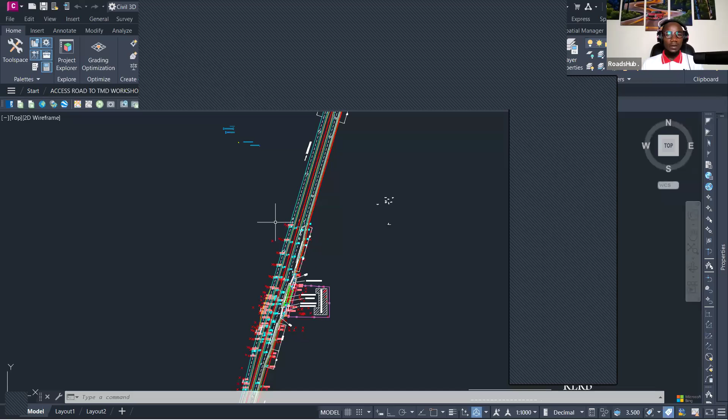We've said that show, don't tell, and this is the time to do exactly that, to show without telling. So this is some work that I received from engineer Samuel Munoru, and I want us to go through it briefly, check for him because he has put in the effort.

We say that when someone has put in the effort, we must be able to acknowledge the effort, and most importantly also give feedback so that now they can develop themselves and become better and better. So let me do away with these points so that now we have a clean working space.

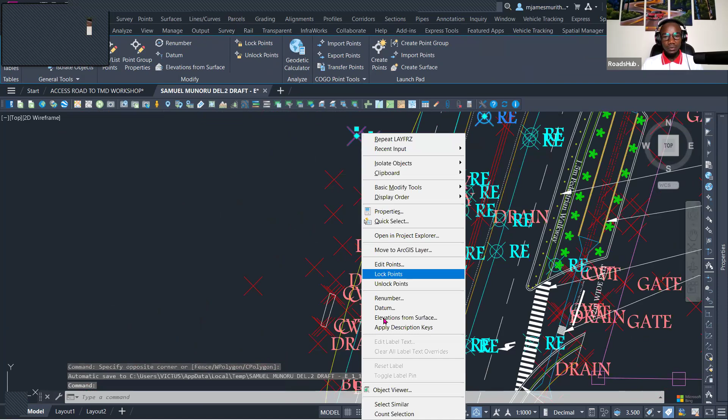So I'm going to isolate objects and say hide selected objects. So I'm going to retain the bus bays and all of that.

So I want us to go to the section where we are designing this. The first thing we're seeing is we're having two lanes at this point, and then we're having the acceleration, the diverging section, and then we are accelerating to be able to make a U-turn at this point. We're having a U-turn of 14.5 meters, including these 3 meters and the 3 meters here.

Remember also, having the deceleration or the acceleration section here is always dependent on the amount of space you have, and also the volume of traffic that you have at this point.

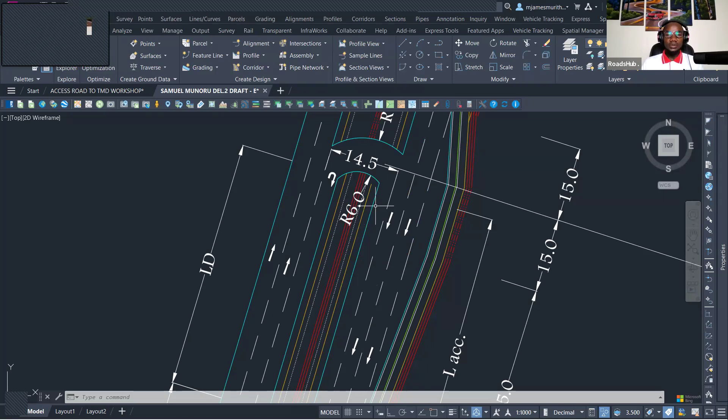And now the trade-off is always about this: this loon design is meant for urban areas where you don't have a lot of space for the sections, and also you anticipate that traffic is moving at a slower speed. So sometimes in your design you may not be able to accommodate the acceleration lane, and therefore you may need to design without it. But of course, the acceleration lane will always serve to improve safety and the level of service of that specific section.

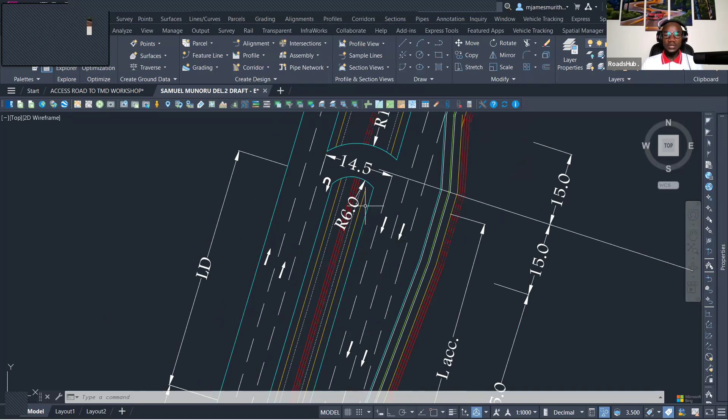On this other side, we are talking about the section for large vehicles. Remember, this section is for the small vehicles, just like we said. And then now we get to do some widening for what the vehicles have. So I can see that the crossover is right here and all the information is done.

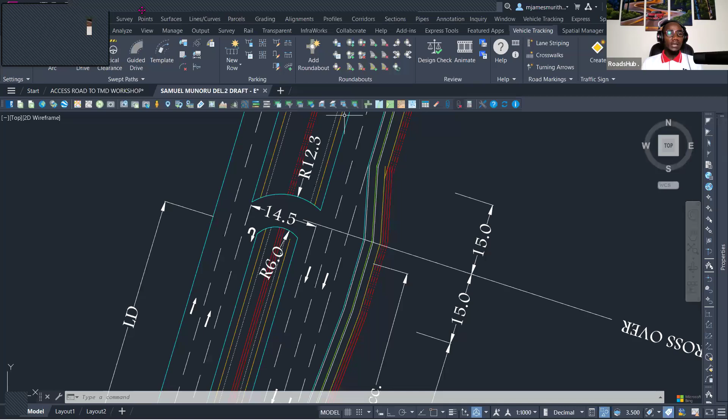So what we do - this is a very well done design, but then we put it to the fire so that we see whatever decisions you made. So I'm going to go to the vehicle tracking, and once I do that, I'm going to activate it.

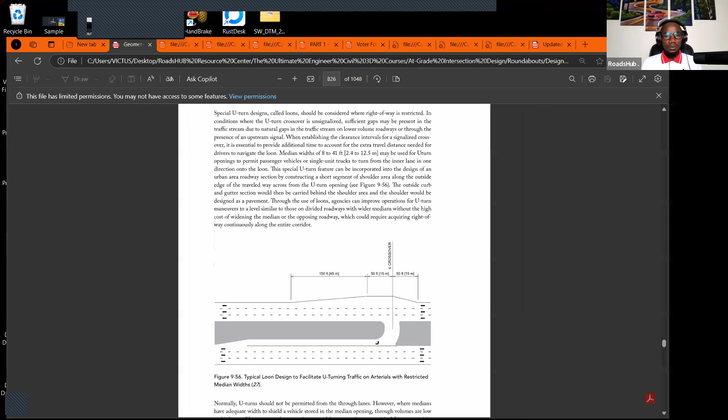Okay, so I'm going to go back to this one, and once I do that, I will hide this. I go to my vehicle tracking. Once I go to that, let me just put this on this other side. So I'm going to vehicle tracking.

Let me load the vehicles. I had done your test before, so let me go to US design vehicles and then statewide AASHTO 2011. And then after that, yours was WB19 - I cannot see it, I don't know whether I can be able to see that here.

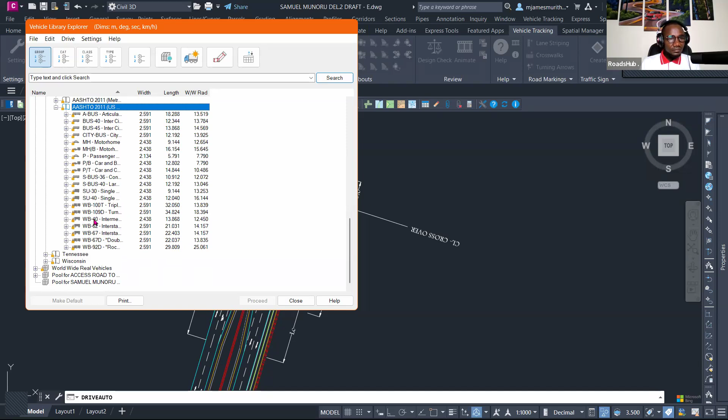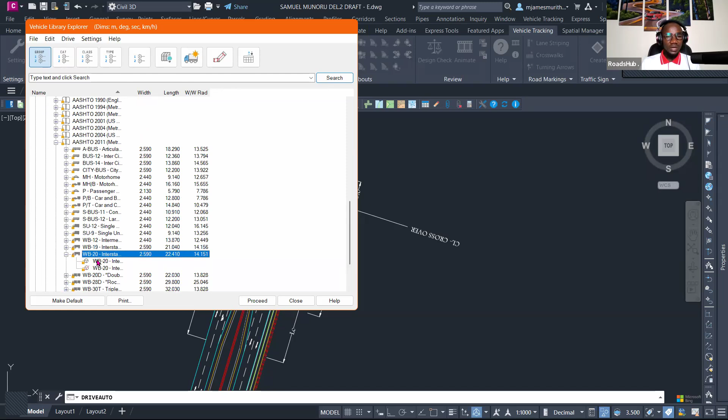I cannot be able to, but mostly you find that the WB40 is always the obvious design vehicle that we get to use. Let me see whether 2011 has the WB19 right here. So you see yours is WB20. Yes, WB20, so let me get to use that, and then proceed.

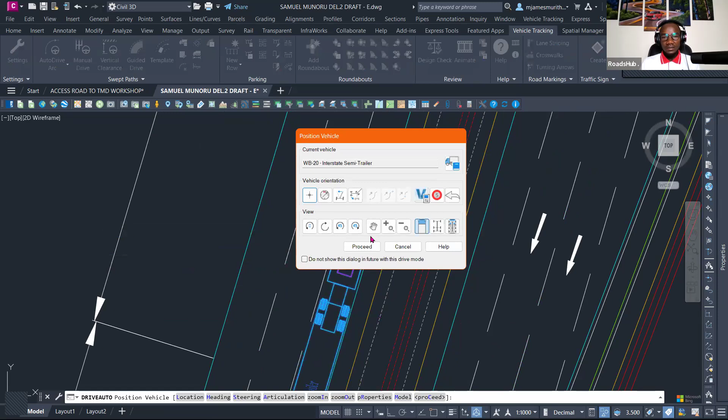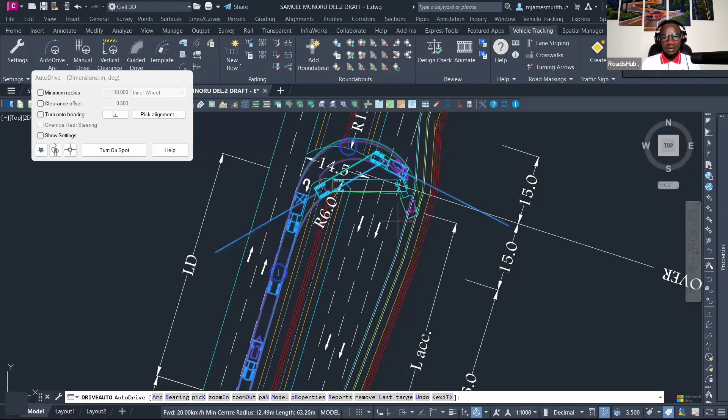I'm going to accept this, so let's put this design to test. So I'm going to have my truck right there, and I can be able to proceed. This truck is coming all the way to this point, and then trying to make a turn all the way to this other side. So you can always have it here, have it at that point, and then now it will start moving all the way to this other direction, and then the truck now moves out.

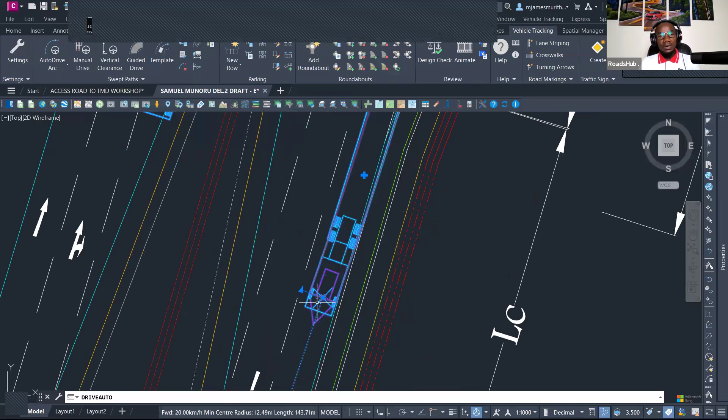Remember, when we are doing this test, we said that the inner lane to inner lane turning is done for the small vehicles, and then the inner to shoulder, because this section will always be a widening that is done on the shoulder, will always be for the large truck vehicles. It's important to take note of that. It is not every vehicle that will make the inner to shoulder turn, it is only for the large truck vehicles, which accounts for the minimum or the least percentage of traffic that you're going to have on your roadway.

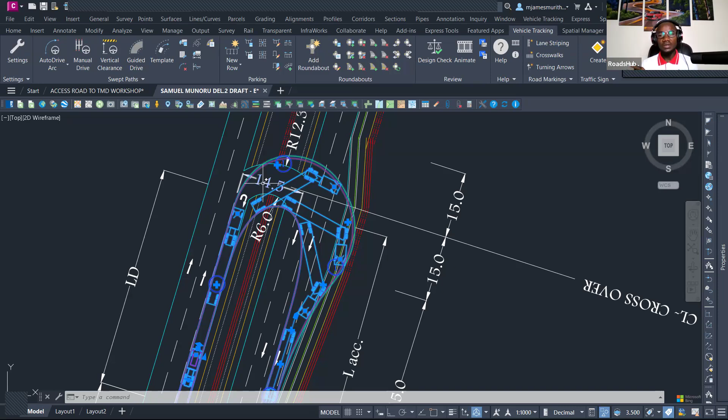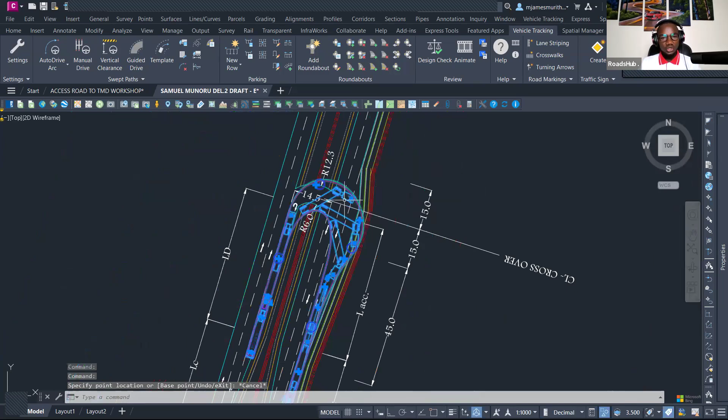Remember, you can always use this node to move it, to check and modify the sections. So for example, let's say I would want to... I think this is the best route I could master from this one. So what I'm going to do, yes, this is a fairly good design, engineer. You can see the only thing is the geometry, where did you position your curves? Mostly these sections will be very wide, and I think we also witnessed this yesterday, and also the geometry of how the curves happen.

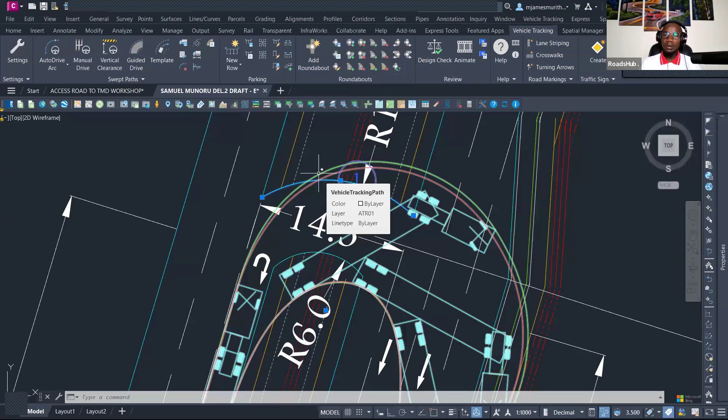As you can see, this one is going to vary according to the design vehicle that you've chosen. So if you choose WB40, it will be different. If you use a passenger car, the section is very different. So I'm going to send you the vehicle tracking check, so that now you can modify your geometry accordingly. You can see with the section that you've provided, it will be very difficult for this vehicle to be able to make a complete turn at this point.

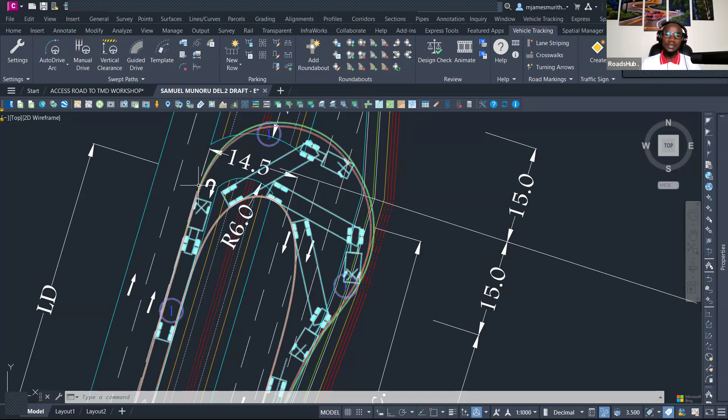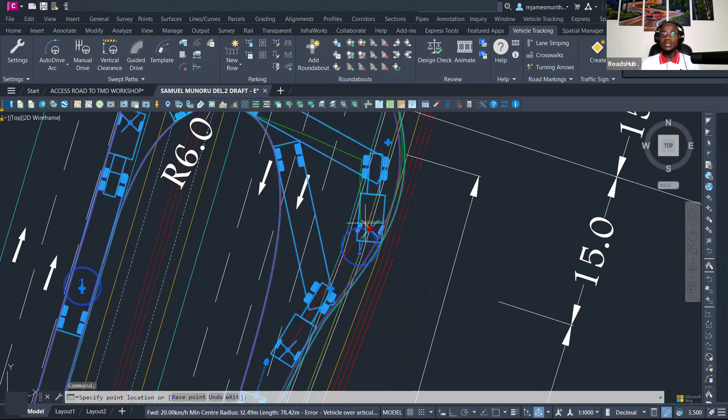You will also note that the standard has not specifically given the actual widening of the shoulder. They are not very explicit on the amount of widening that you need to have on the shoulder, because the geometry that you have here will be able to determine the amount of widening. For example, remember like yesterday we were talking about doing a widening of 3, and clearly you can see it cannot accommodate the design vehicle. It's important to know that this is more of a sample design that we are working with. In an actual design, you will have the traffic survey done, and you will know the vehicle you are working with, the dimensions.

And then as you're doing your vehicle tracking test, actually now I think it's a requirement in almost every urban design, in every intersection design, you must be able to do a vehicle tracking to show the path of how the vehicles are going to move through that section before you complete it.

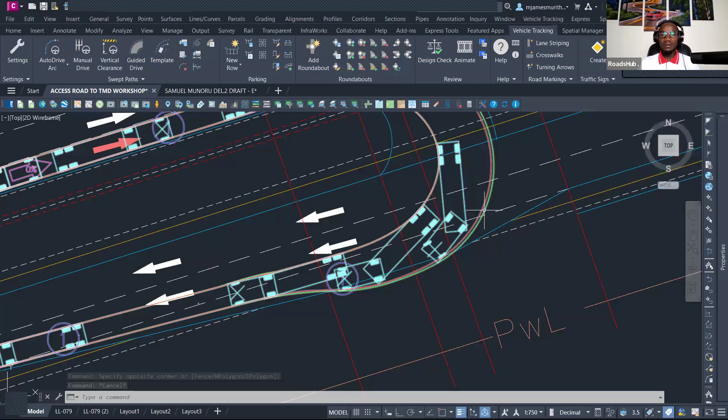I also got to complete the same, I just did what we were working on yesterday. So this is the same track moving all the way around the section, and this is the movement that we are making. Just like what we have seen with Sam, we can see that the section, how we thought of widening it by just having the 3 meters, would not necessarily be able to take care of all our needs or ensure a very smooth maneuver for the vehicle at this point. So we can be able to actually visualize that.

So I'm going to select the vehicle tracking, let me position it well on my screen.

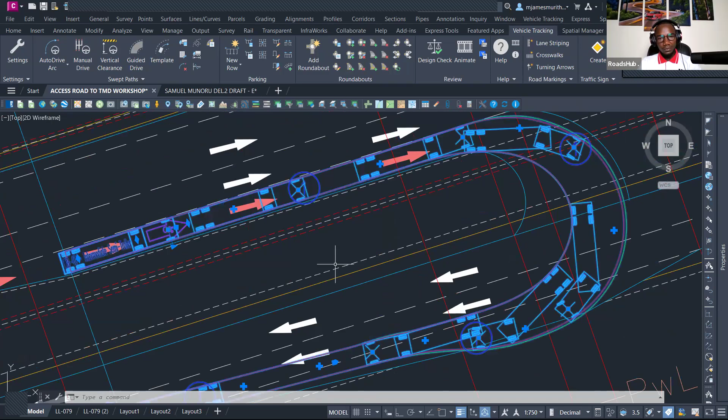I'm going to select the vehicle tracking, and then I'm going to animate, and in the animation I'm just going to play it.

I want you to look at something. Just look at the start. There is a vehicle here, at the very start, I don't know whether you can see it.

We wanted to drive through the section, so we just play it and we can see how it's going to make a turn. You can see it's making a very smooth turn and getting out of the section very smoothly.

This is an important part for you to note, at least now that you know the vehicle can be able to make a turn at this point, it is easy for you now to modify your geometry to accommodate these.

Other than now you just submitting the design and they have already done the setting out and all of that, they have actually done even the base layers, and then that's when they notice that the vehicle cannot be able to make a complete turn through that section.

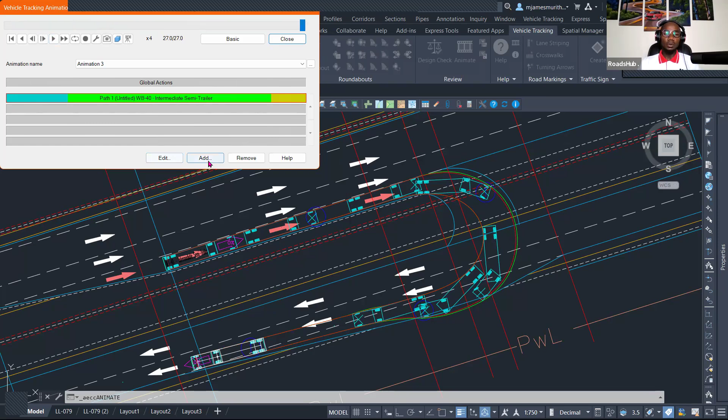So this is a very good swept path analysis of any design. It's very important for you to make sure that your design is at least functional, that it can work in a real site scenario.

So today's session is going to be actually a replica of what we already did last time, and I hope that you also get to work on it.

These are not the kind of things that you listen to and observe and watch. They are not, my guys. They are not. These are the kind of things that you must do - you must experiment, you must do them.

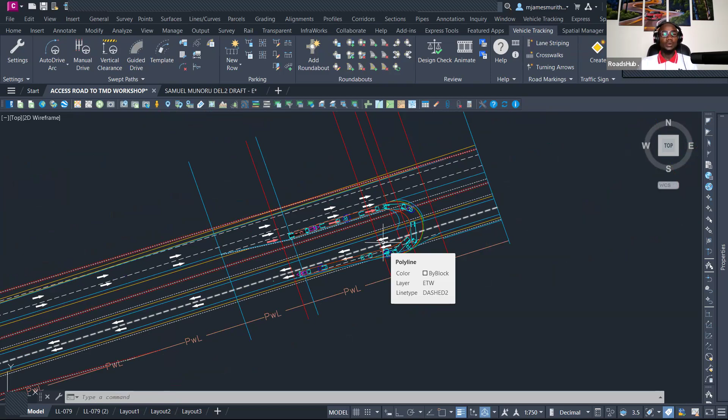Take your time, work on them, experiment. I'm actually offering to give you guys guidance, and this is what surprises me - you offer people guidance and feedback and they don't do it. So I want you guys to be different.

I want you to work on it, find some time. Out of the sessions, you can allocate 45 minutes, work on whatever you can within that time, and then you can submit it for review if that resonates with you.

So I will repeat almost the same process. Today I'm not going to do everything for you guys. I will leave it as a task so that you can work on it, so that tomorrow we can focus on production of this design.

Tomorrow is also on Saturday. I would encourage you people to take time and work on this design. Probably you'll be off from work, you will get some time.

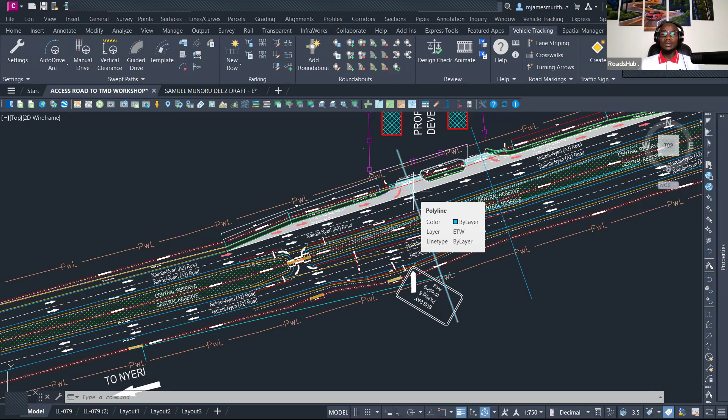You will not get anyone who is training you on these things, I'm telling you for a fact. And therefore, if you don't do it, it will just go to waste, and I don't want that to happen to us.

So we are going to do the same for this other section. The most important thing to consider is which traffic are we taking where? In this case we are taking the traffic on the left-hand side and we want to take it to the right-hand side, and at what point should the traffic be able to make the turn?

So you find that there is someone who will be able to do it at even 100 meters from the edge. But of course, that would therefore lower the capacity, or the level of service, of the road. For example, you can see here we have

the deceleration lanes, and then you want to have a U-turn just next to it - it means now it's going to obstruct traffic. So in this case, we do 400 meters, that's what we are working with, and we are already at 400 meters.

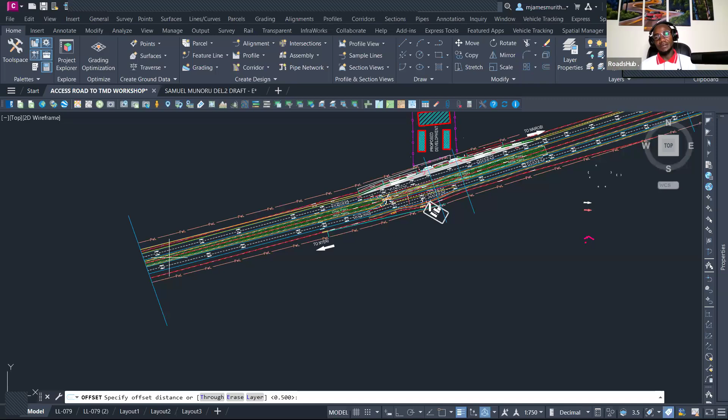Should they be beyond the 400 or should they be in the 400? That is also the other question. Remember, this is where the point of the U-turn should be, so this means motorists can start decelerating before the actual U-turn.

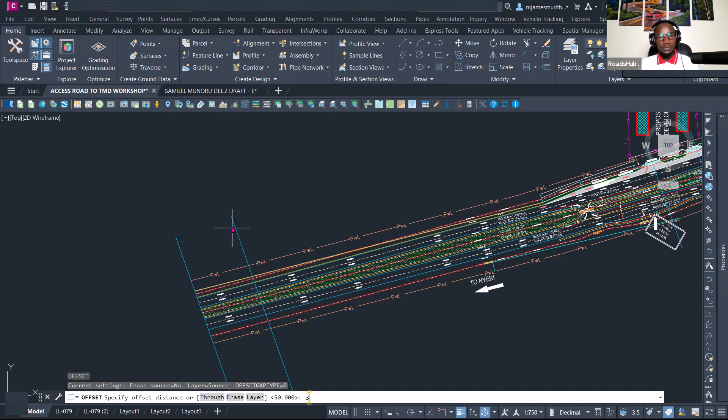So we do the offset, and in this case we have a deceleration section of 50 meters, so we can do 50 inwards. Then after that, we do another 35 for the diverging section. Let me offset, and this one is going to be 35, up to that point.

Once we do 35, we can start modifying and editing the entire section. The first thing is we can trim the median and just remove it for now, so I'm going to remove that part of the hatching.

As we said, the next thing would be the width of your deceleration sections. So offset again of 3 meters, so this is 3 meters in, and then of course we want our curb at 0.2 or 0.3, whichever kerbstone you have for your case, and that's it.

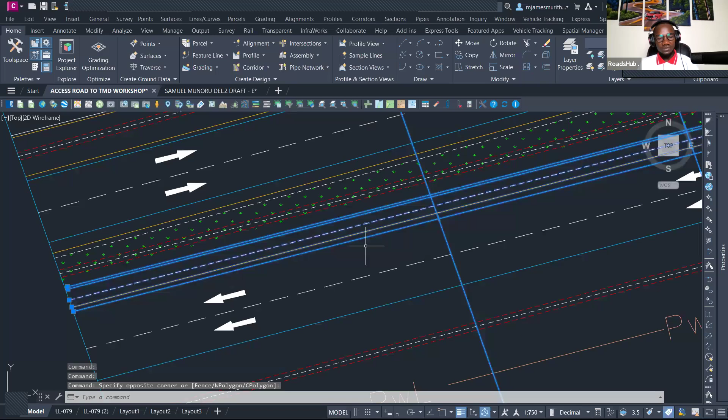Once that is done, we can trim all of these other elements. Let me see how I do that. Yes, I can select all of these and say trim. So in the trimming, I want to trim the shoulder and trim this one, also trim this and also trim this, so I'm left with the edge of traveled way of the existing roadway.

And these other points, what do I need? I do away with this, and I also do away with this point, and I will also do away with these ones because they are not continuing to that edge. So I want to connect this point, the edge of traveled way, should be able to taper back to where we have our edge of traveled way of the normal carriageway.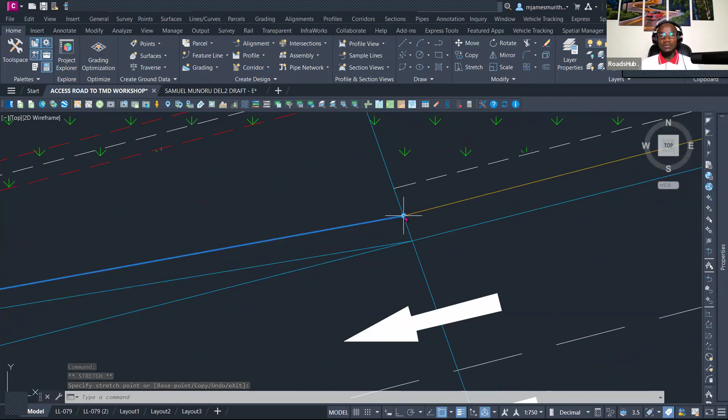Therefore, if that's the case, we should have a protective curb at the back of that section. Sometimes when you do the offset, it doesn't snap directly to this point, and also remember, sometimes you don't have the curb all the way to the roadway, but if you hand it, you can join it directly to that point. But of course, the obvious way is that it needs to taper back to the edge of where you have your acceleration lane. This is also contextual, depending on what is happening on site.

The other thing is we can break this section. Remember the road marking, and these lines should go hand in hand with the principles of road marking. So if you're marking this section, it needs to be a broken line, and a broken line means vehicles can merge or change lanes from one lane to the other. So we break this, go to modify, and there is the break option, and we select this point to break our acceleration lane.

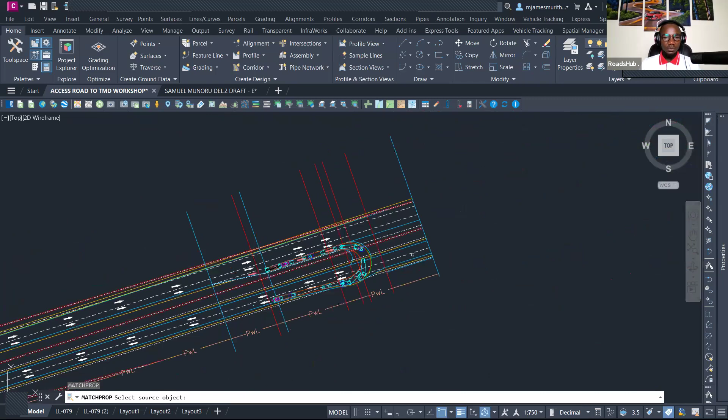The next thing we need to do is match properties. I don't know whether we prepared one for match properties, let me look at what we did for these. Yeah, so we are going to use this one as our reference, so we match properties with this so that there is uniformity.

Then after that, there is match properties for the kerbstone, so we want the kerbstone to be uniform throughout the section. This uniformity of the different elements representing, or rather the different AutoCAD objects representing our design elements, is very, very vital for you as you do your design.

So that's it. In this other section, we didn't include an acceleration lane on the other side, so now I want us to factor it in here. The assumption is the traffic is very high, and we have sufficient road reserve, or the median is wide enough to accommodate our section. Remember also, this is contextual, depending on what is happening on site. There is no one size fits all. Your work is to provide a solution that is going to work on that specific site you're in.

So I'm going to do my offset for the other section. It's basically the same thing that we were doing.

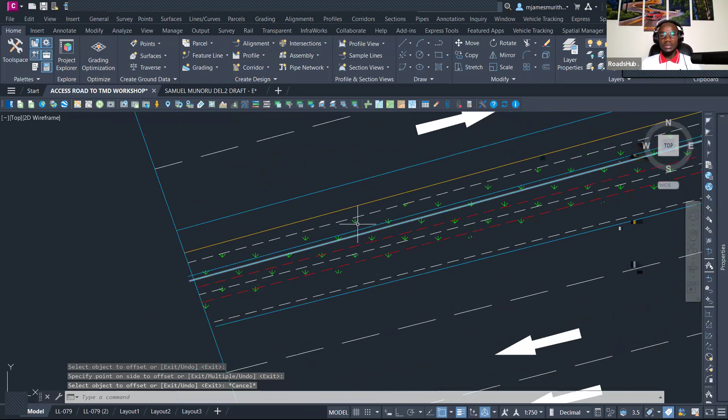It's important to note, as I said earlier, this is contextual, and therefore you need to be careful where you position your different elements, so that you don't give designs that are not workable on site.

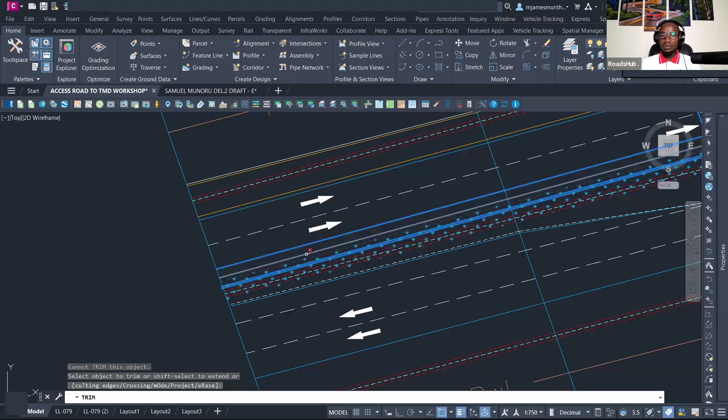So what do I need to do? I can clear these elements because I don't need a shoulder here, and I also don't need the median, so I can do away with it at that point. Yeah, that's good. I have my sections, and that's all.

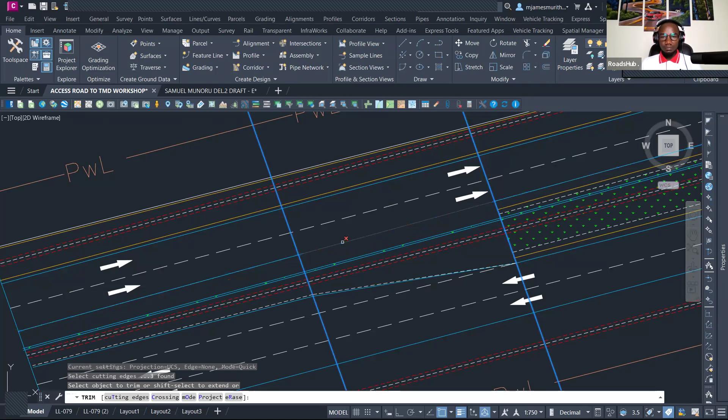What I need to do is I should have trimmed this part, trim right there. Should I? Yes. So I have my acceleration section here, and therefore this one will need to taper into the edge of traveled way.

Remember, now you're directing your traffic back to the main highway. That is what you're doing at this point, and therefore this should have been continuous up to that area. And then I also need to do away with these lines because I don't need them. Trim that, and then I'll do away with that.

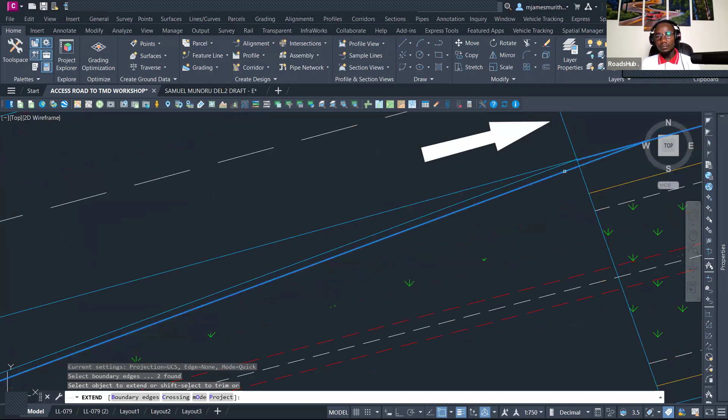And then I'll do another offset of 0.3 meters, and push it here. Make sure that it tapers nicely into this. I make sure that it tapers nicely into that.

And once that is done, I use MA again to match properties. For this section, this is the deceleration. And then also for the kerbstone, this is the edge of kerbstone. And then I am done with my section in that manner.

So once that is done, at least I'm confident what is going to happen. I can be able to even have my arrows of traffic just to show the direction of traffic at that point. And I can also do the same for this other side to show how traffic is going to maneuver into this area.

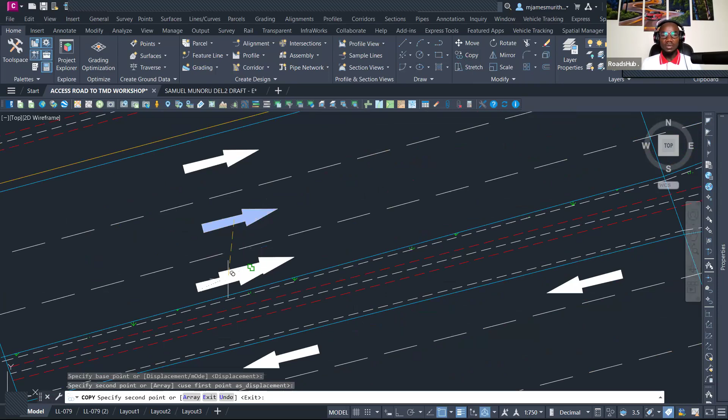Now there is the other point. If you find that this can be accommodated in your section, there should be uniformity of design. This is an obvious thing that follows our natural human behavior, that if we go to this section and see Y, or see something like this, what we expect is when we go to another similar area sharing some similar characteristics, we expect the same thing.

So this is why, for example, when designing these intersections, it's important if we have decided that, and we can see that this one is being accommodated. Let me see.

Let me see what is remaining of the median section. It's 3 meters. So okay, 3 meters, actually almost 3.5 meters. So that can be able to accommodate a good ditch at this section.

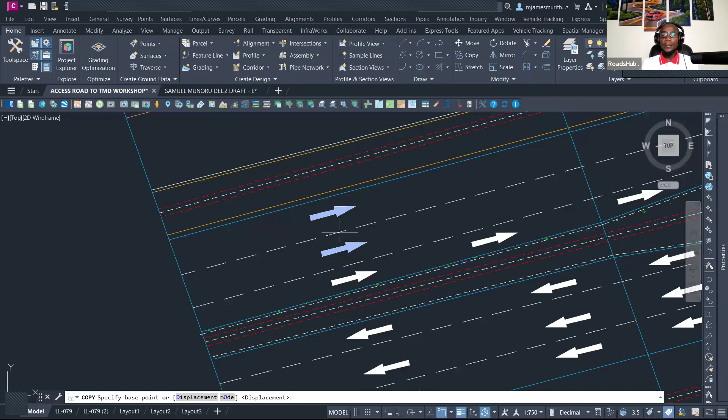So if this is the design that we have adopted in this section, please note that even in the other sections, the drivers will be expecting that you have an acceleration and a deceleration lane. This is very, very important for you to maintain the consistency of your design. And that is a principle, actually among the first principles of design, that you need to ensure consistency of the design elements to make sure the drivers don't get any surprise elements along your project road.

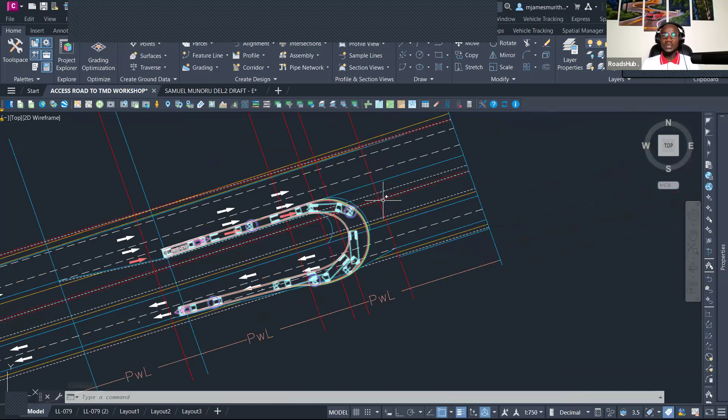Okay, now the next thing that you'll be doing is we want to design the turning that we need to have. So what we're gonna do is the same thing that we did to this section. We want to extend our roadway at least some meters up there so that it can accommodate the U-turn, and then we show a section that is above the U-turn.

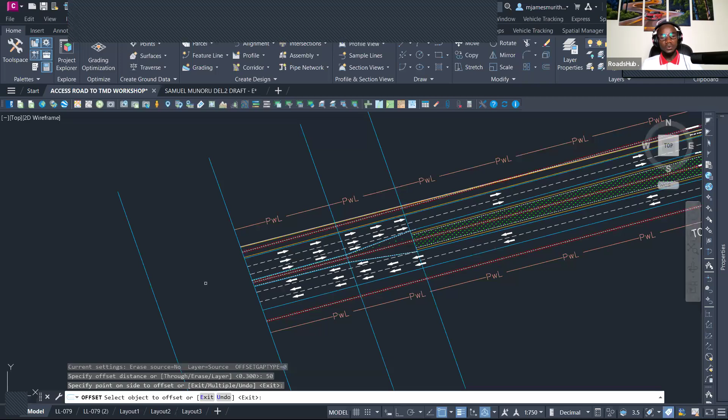In this case, we can actually do an offset of, let's say, even 50 meters up to that point. And therefore what happens is I can extend my elements to this area. So I'm going to say extend, and I am done with that extension. So after extending, now we know this is the mark where our U section should be able to start from.

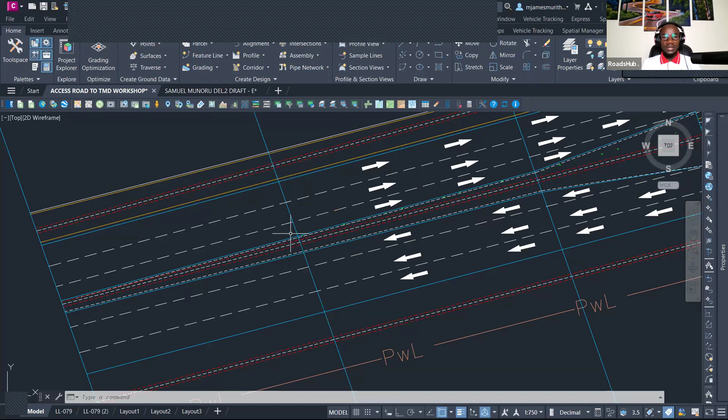It's important to note that during this extension, we should have done it before, because now it has extended as 3 lanes, and that is not the case. That is not what should happen, because the deceleration lanes are not going all the way to this bit.

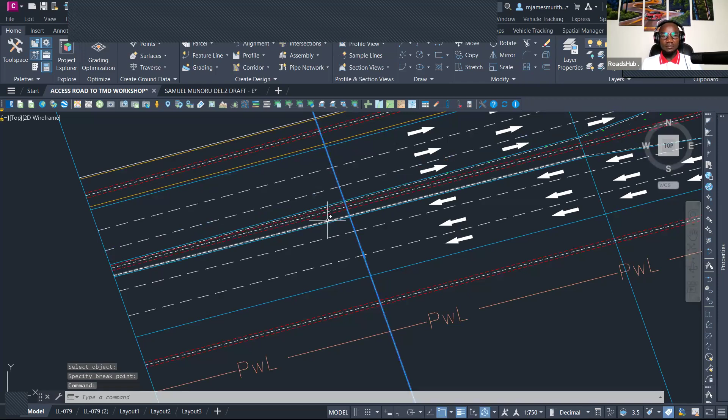So what I'm going to do is use the trim, or rather break. I can break this one at this point, and I want to break this one at this point too. Then I can trim these other ones. I want to select those two, and these, and these, and then trim them. I want to remove these, remove this, and remove this.

You don't want to have any confusion at this point, so just do your work slowly. There is no gun on your head to rush.

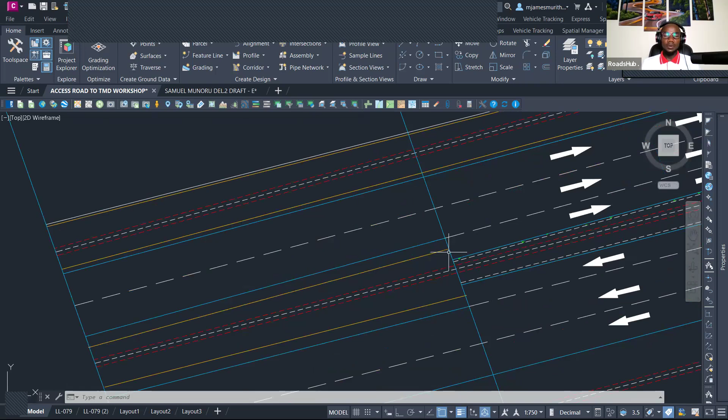After that, we are able to say at this point this is where we want to have our median, and this is now the normal road section. For us to do that, let me just...

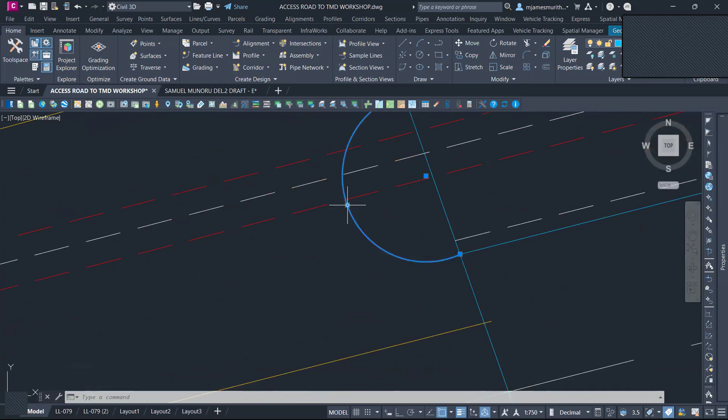Do the usual U-turn that we did. I told you that for you to be able to do any design, you must first assess the existing site conditions and what is ideal for your area. So this is how a normal U-turn, considering the median of the section that we have, this is what we can achieve.

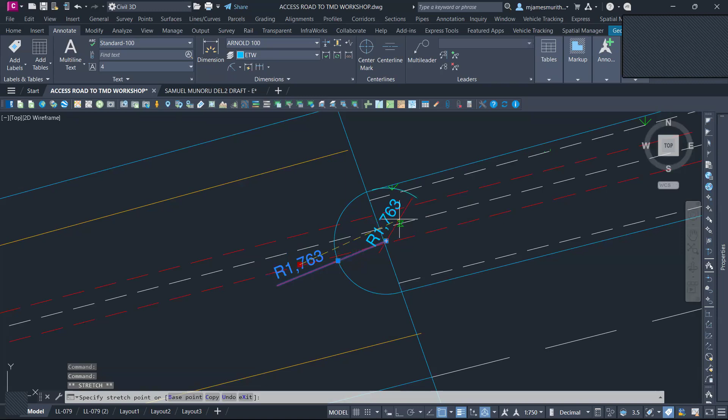The next thing would be to take measurements for the same. So the radius of this is actually 1.7, that is the radius. Remember, in this case our vehicle is turning from the inner lane here, from the deceleration section into this acceleration section.

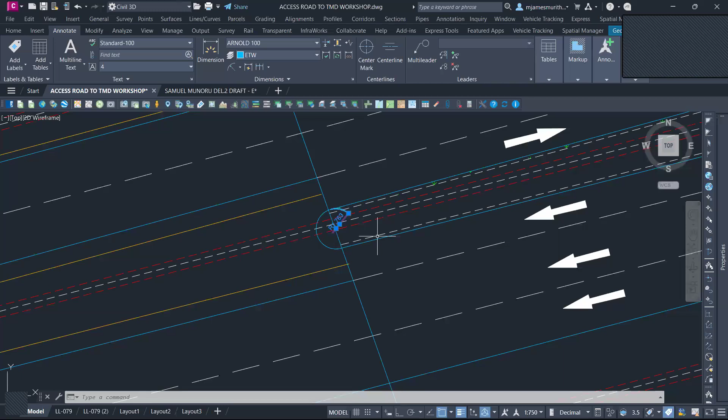And sometimes that may be difficult. This is the other limitation of when you have the two lanes very close here, the turning may be an issue for your design. That is always the other challenge that you find, especially if the median has become too narrow.

If the median has become too narrow after adding both your deceleration and acceleration lane, it becomes difficult to get a sufficient distance to make the maneuver. This would force vehicles not even being able to use the deceleration section, but turning all the way into the inner lane. And that's why it's called the loon, an improvement or devised kind of design element meant to utilize sections where you cannot have a complete maneuver.

So let's proceed and see whether this can be justified. I'm going to offset. You remember we must have an offset of 0.5 for the path of our vehicle. Remember the vehicle is 2.5 meters wide, and when we do the 0.5, it means whatever is left even in the edge of the traveled way, the vehicle will be able to move smoothly here.

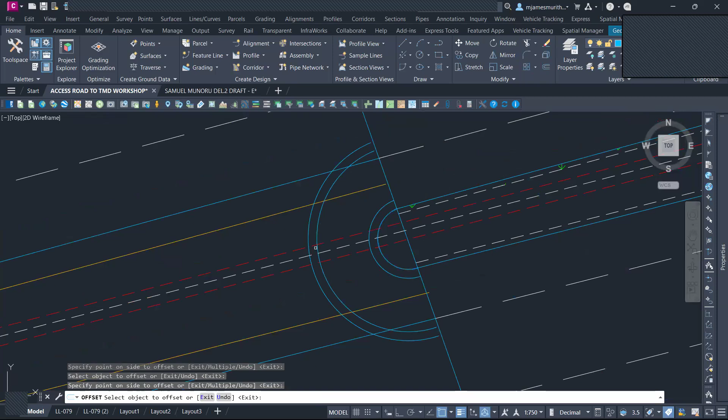Then after that we do another offset of, for example, let's say 3.5 meters. Oh no, it should be for this one. And of course, the 0.5 and the 0.5. So that ideally forms the ideal path that we would see for a normal vehicle.

Let's check whether that is also something we can work with. I'm going to select a passenger car, of course that is always the first vehicle that you're designing, that's where you always start with. You're going to start at this point and come with it very, very nicely up to that area, and then you get to this point and you'll be able to make a turn.

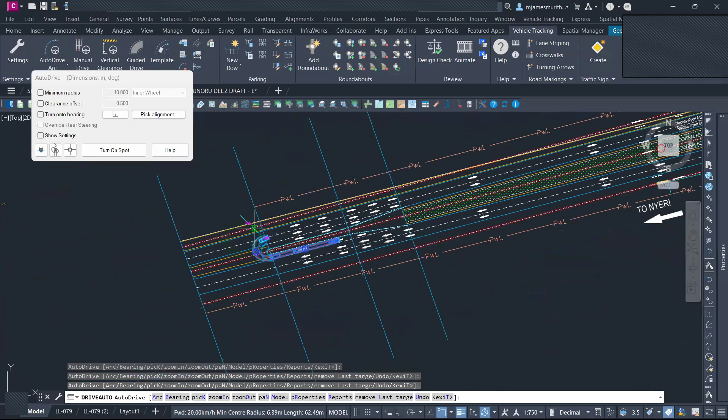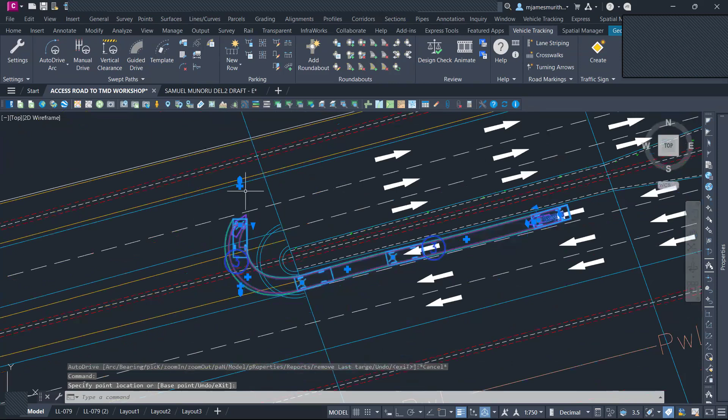Sorry, let me get to do these. Okay, I think I made a mistake there. Let me add one extra vehicle right there, and then after that we can be able to make a complete turn, and then after that we can add one extra vehicle right there.

I can see someone is in the chat box. I know.

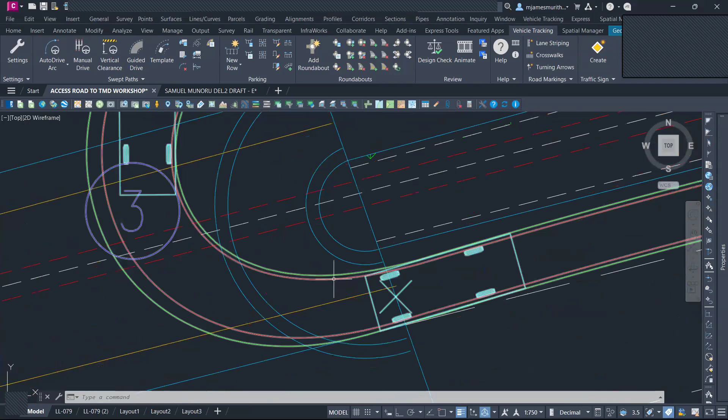Okay, so that's done. Now we need to adjust and see how this fits into our design, and then you'll be able to check it out.

So that's it, you can turn this area. Now this is the other challenge.

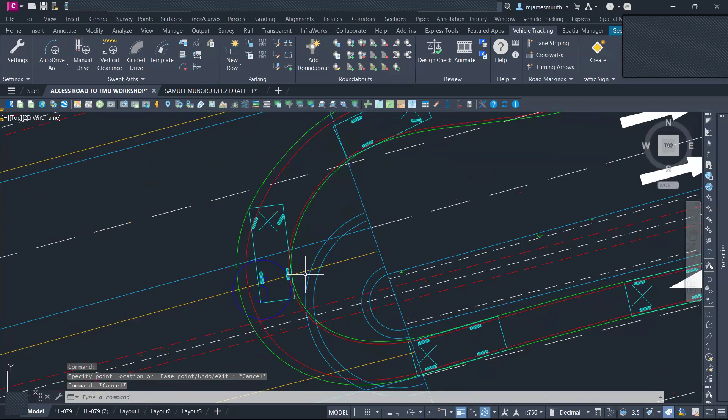The reason for this is, if I wanted my vehicles to turn directly from the deceleration lane to the inner lane, that's achievable. I can achieve that. But turning from the acceleration lane, having a deceleration lane, and then going directly into another acceleration lane within a very short median, is impractical.

It's impractical. So the size of the median here, as detailed in the AASHTO Green Book, determines the kind of arrangement you're going to have.

So it's easy for a designer to assume that if I do a deceleration and acceleration here, it's going to work perfectly fine. But as you can see, it's almost impossible even for a minor passenger car to get from this point, as designed, into this other area. These are the things you get with practical insights.

You can see it's not possible for us to achieve such a maneuver. The best maneuver we can achieve at this point is to have our small passenger car moving from the deceleration lane into the inner lane.

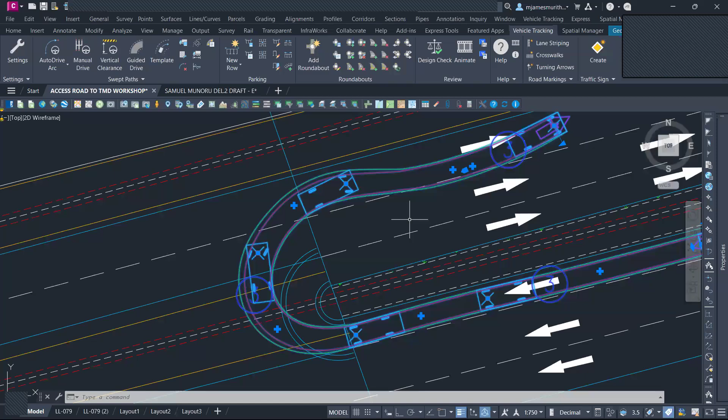So this means our design, our proposal to provide this acceleration lane at this point, is not viable for this section.

So if, for example, we removed it - let me change this to some other layer, let's use layer number 10 for my design - and assume we don't want to have it.

This means our vehicle would be turning from this point, and then going all the way into the inner lane. So this means I can remove this one.

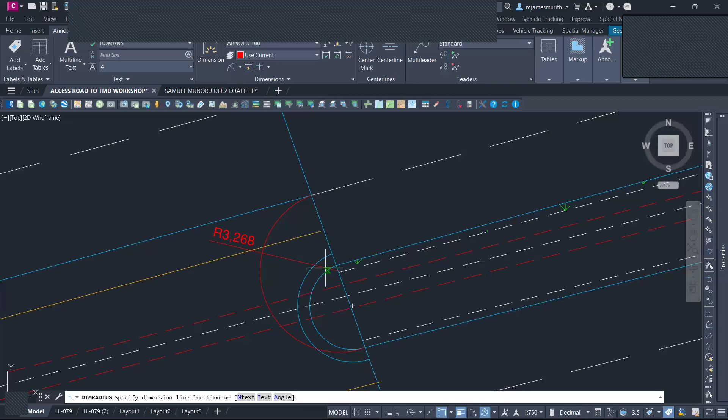And if we go to annotate, I can check and see my radius is at 3 meters. It means our median is becoming smaller and smaller for these sections, and that's why we're having 3 meters.

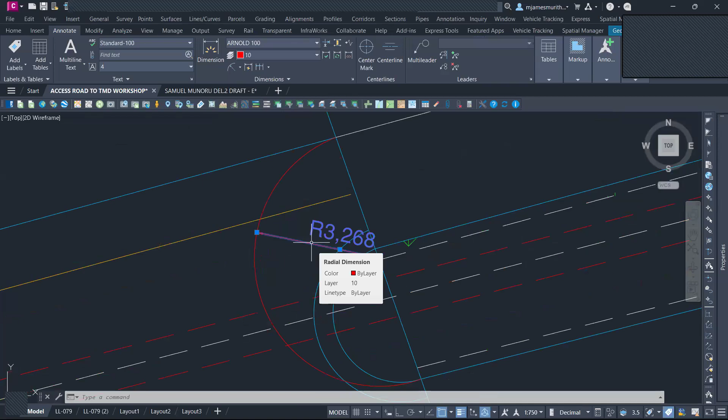Remember, from the design vehicle manual we saw, we need at least 3.8 meters. So you can see the median is slightly narrow for us to accommodate this. Because if we were to achieve the 3.8 meters that allows a passenger car to turn, this is how it would look - our median would be a little bit bigger.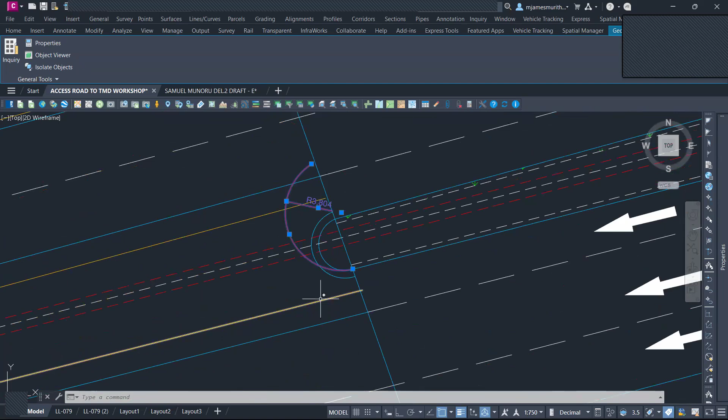So these are scenarios that require you to devise how we can do our design.

So let's offset this by 0.5 - okay, not this one, sorry, we need to go back to where it should be. That is the first principle. We are going to the edge from the inner lane of this section to the inner lane of the other section, and then after that we can offset it by 0.5.

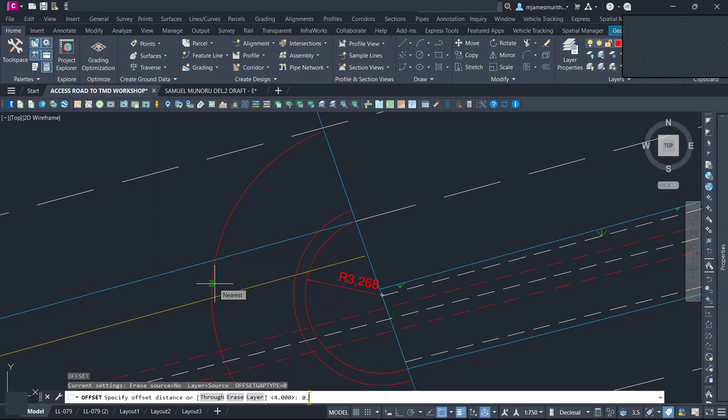And then offset it 3.5 first - remember that's always the inner principle - and then 0.5. That is always the principle. You must first start with the first principles.

So we are iterating with the first principle, and that's not possible, and then we do this second one to check and see what happens.

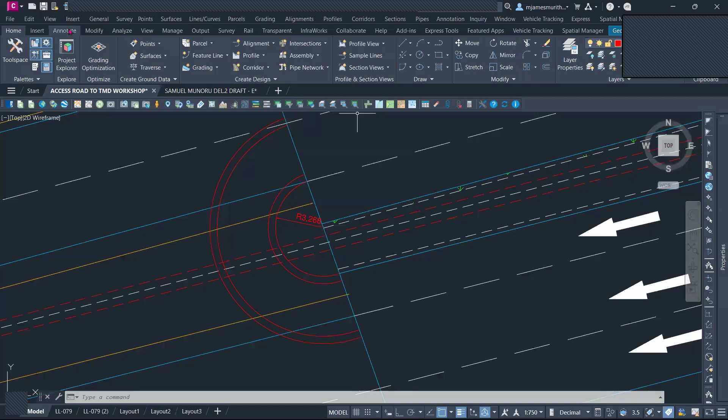And this is why, if you're doing your designs for registration as a professional engineer or professional technical engineer exams, you design from the first principle. All your designs must be from the first principle, not improvements of what you think should be the case in that area.

The first thing that must be done is your design must be fully as per the first principle. And if you can explain the first principles, then it's easier for you to use your knowledge to devise other methods of application or to solve other problems.

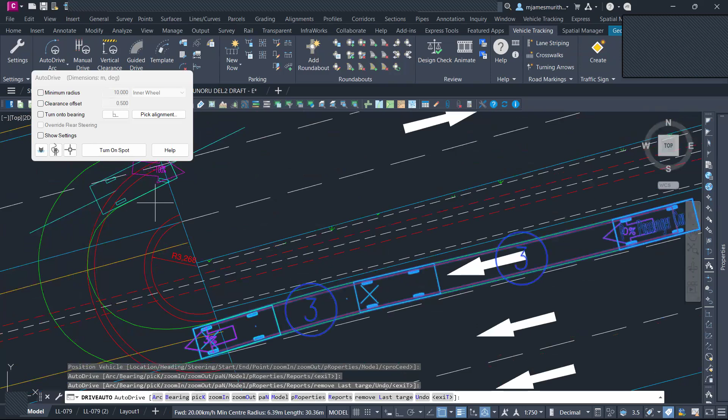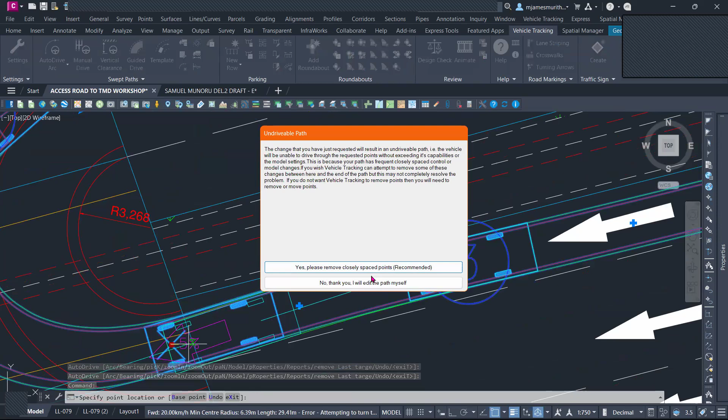So this one could be like that, this could be like that, not that area, that way. Let me just end it at that area, but I will tweak it. So let me add these.

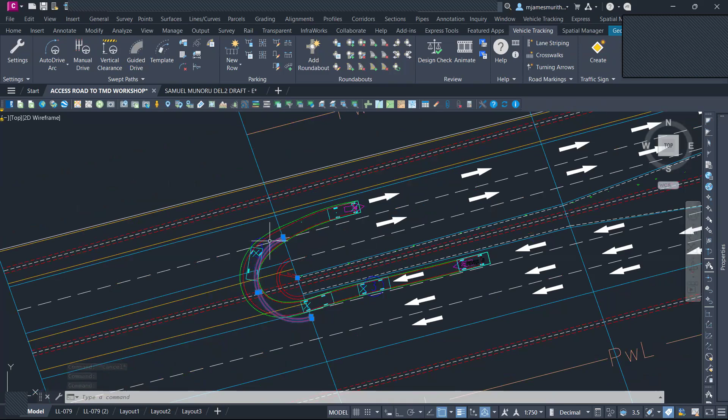And then I can be able to complete my maneuver in that manner. So you can see also, even if we go from the inner lane to the outer fast lane, it's becoming very difficult for the vehicle to make an intersection in this area. So we can see the impact that the size of our median plays when it comes to U-turn design.

There are scenarios where the median is too small. It cannot accommodate a complete U-turn, it cannot complete it. And therefore you would need to do some widening of the outer edge. That is the outer edge for this roadway to be able to accommodate the complete turn of the vehicle, because that is the only option left for us here. It's practically very, very impossible for us to do that.

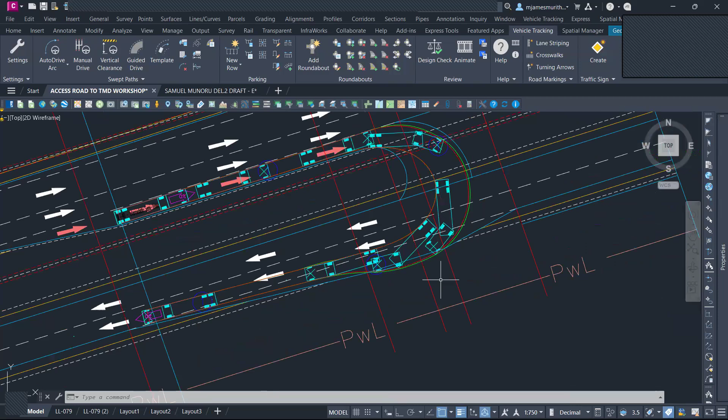So it would require widening the outer edge of the roadway, and then, of course, widening this section just a little bit, the same way it was done. You remember the same principle we used to widen this section so that we can accommodate the turning maneuvers at that specific point.

So that is it for me. I was not going to do this section for you, so please go and do the section for yourself. It's a way to practice. You've already seen how we have done this other part, so go and replicate the same knowledge in this area.

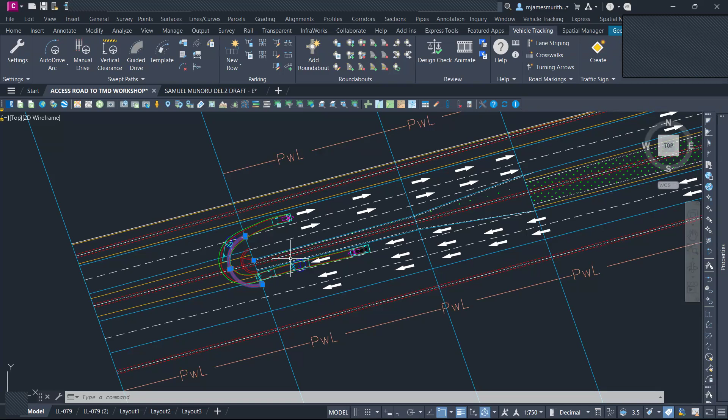Make decisions - as an engineer, your point is to make decisions. And as I told you, make sure that what you are adhering to are the first principles of design. That is what you should be learning now. So how would you make sure this section will adhere to the first principles of design?

How will you make sure that in your design that you're going to give to the client? And this is always the other problem - don't think in terms of saving the client and spoiling the profession. Because if you spoil the profession, it is your responsibility. It is your moral obligation to protect the profession and to be an ethical engineer. That is always your principle.

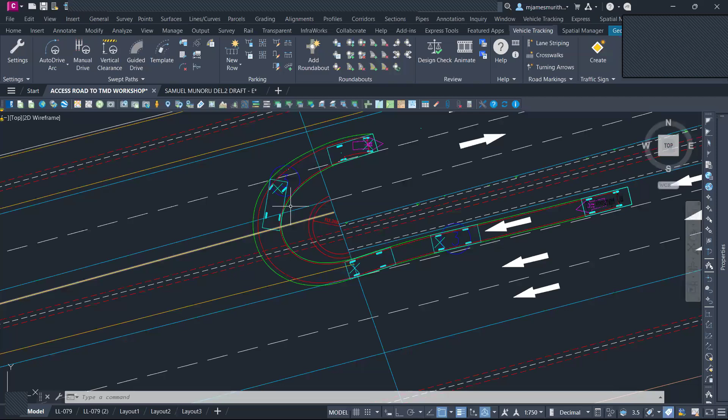So if this is not fitting in here, what do you do? What do you suggest? You can do the widening, and I want to see how you modify the section to fit in. You can see clearly the vehicle tracking we have done here - it's impossible to turn. So I want to see what you can modify in this area and ensure that your design is compliant with the first principles of design.

What do you propose? Remember again, we were working for a client - this is a private developer who hired us to provide a solution for them. So please note, the solution we are providing should not affect the existing traffic, it should not disrupt traffic for us to fit in. These are some of the causes of why this proposal would not be approved. But if you can devise a way to restructure and redesign this section to accommodate these turns and maneuvers safely, then your proposal will be accepted.

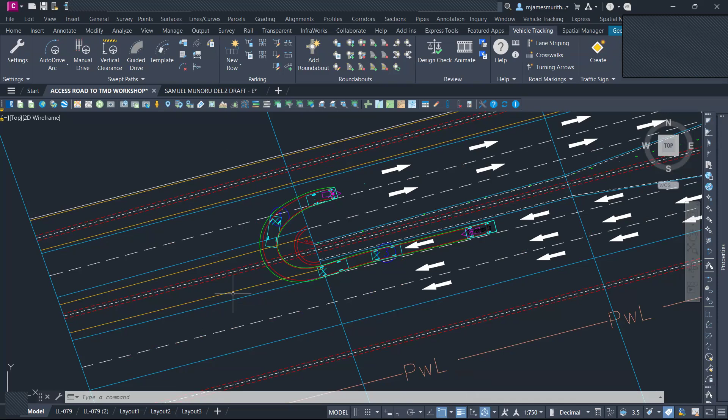And that is basically what your work is. That's basically what you'll be doing for governments, for clients, for companies and developers - provide a solution, provide a solution.

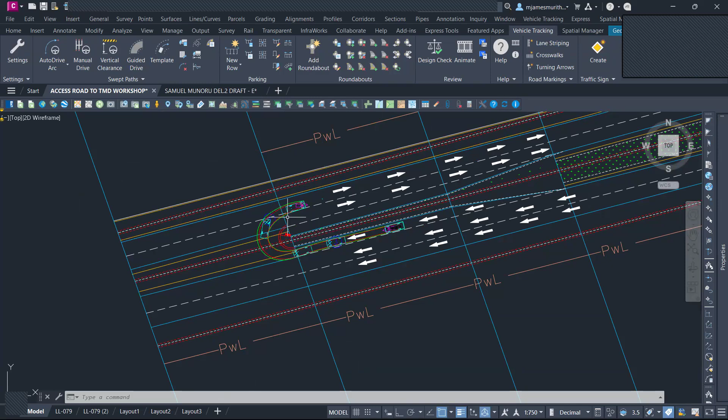So this is a task for you, this is a challenge for you. Tomorrow I will be looking at what challenges, how did you get to solve this point? How did you get to solve it? What proposals are you having for this area? Please, for those of us like Sam and I think it's Innocent who have been working on this project, make sure that you work so that we have at least something to look at tomorrow. Otherwise we will proceed into production.

So we see how do we get to compile a proper book of drawings. That is the task that is left for us because we are already done with the design. So what we'll be doing next week, actually from tomorrow after you guys bring your proposals, we review them and finalize. From that point going forward, we will be preparing a proper book of drawings that we can submit to the client for approvals.